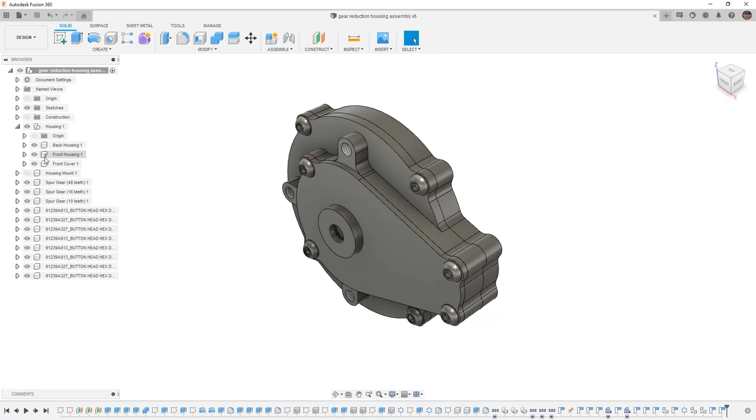To get started, I'm going to hide the front cover, and I also want to hide all of the hardware. So I'm going to start by selecting the eye icon on all the hardware. Note that you can also do this by selecting all the hardware, right-clicking, and selecting Show Hide. You also have a Show All Components and Show All Bodies option.

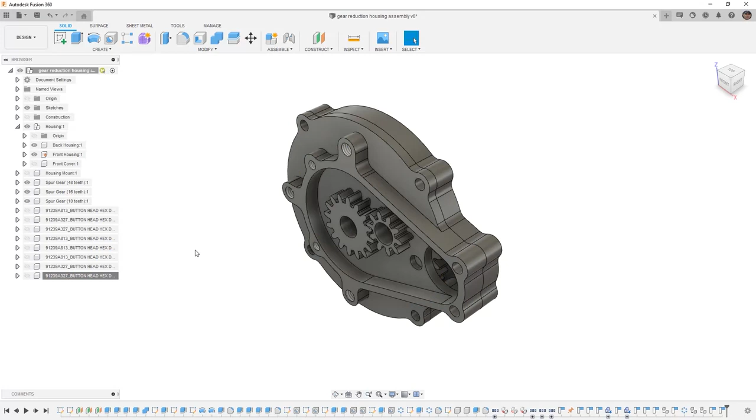From here, what we want to do is we want to begin creating a copy of the smaller idler gear, and then we also need to create a copy of it that we can modify. So we're going to select the spur gear 10 teeth, we'll right-click, and we'll select Copy. Then, at the bottom of the browser, we're going to right-click and select Paste.

This automatically invokes the Move Object components, and we can move it roughly into place, but ultimately we're going to be using Align to position it. You'll notice that it's not quite in the right position, so I'll go to Modify, Align, and then I'll begin by using Control or Command to select the bottom position of the gear, and then I want to select the top position of that hole. I'm going to capture the position and say OK.

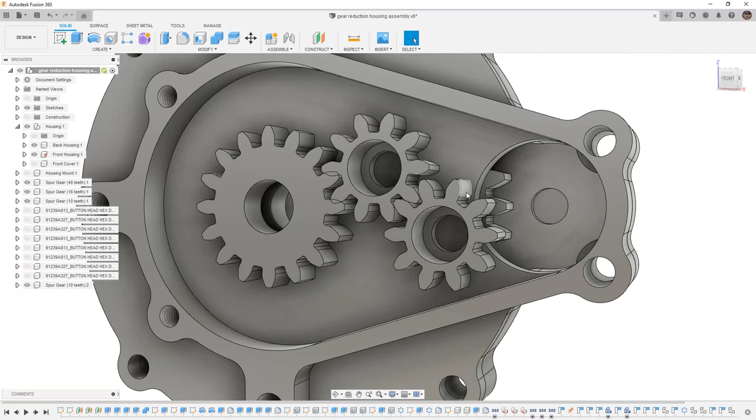This will be important later on when we begin to add our joints because we can use as-built joints if everything is in the correct position. Now that we've created the identical copy of our idler gear, we want to create the version that is the 21mm long idler gear that's going to connect this idler to the drive gear. In order to do that, we need to use something called paste new.

You can see that here we have spur gear 10 teeth :1 and spur gear 10 teeth :2. This means that they're both identical copies, and any changes I make to one will affect the other. This also means that downstream in a bill of materials parts list, what we're going to see is that we have a quantity of 2 of that gear.

If we instead select the gear and we copy it, and then if we right-click at the bottom of the browser and we select Paste New, the Paste New option will create a new unique version of that component. We're going to move it off to the right-hand side, we'll capture its position and we'll say OK. Notice that it's still called spur gear 10 teeth, but instead of a :2 after it, it has brackets with a 1 and a :1.

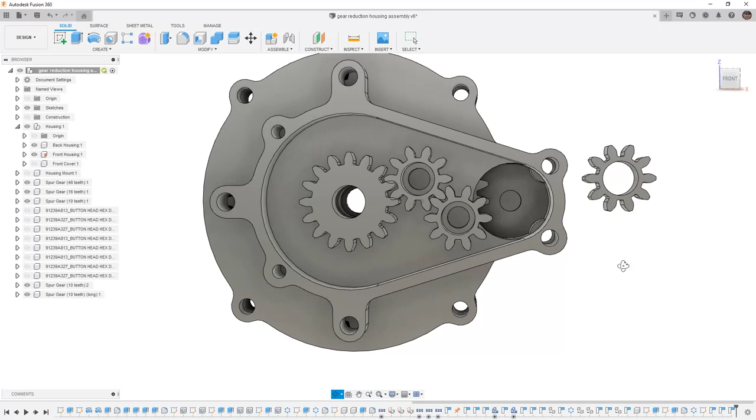We can select and rename this, and instead of 10 teeth, I'm going to put in brackets long, so that way we know that this is the long idler gear. Now, you'll remember that this idler gear is supposed to be 21mm long. If I hide the back housing, it's going to need to travel from the front of this gear all the way to the back of this gear.

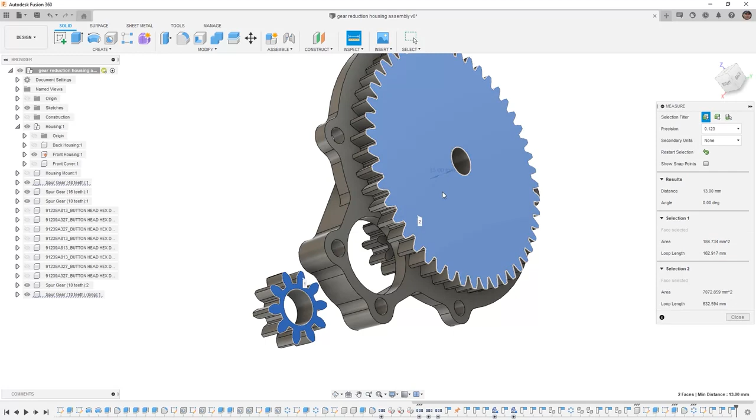Now let's go ahead and use Inspect and measure the distance to make sure we understand how far it has to go. The distance between these two is 13mm. So we're going to select a tool called Modify Press Pull. We're going to select the back face of this gear, and we're going to pull it a distance of 13mm. We're going to say OK, and now we've created a long version of that gear that goes from the front of the other idler gears to the back of the drive gear.

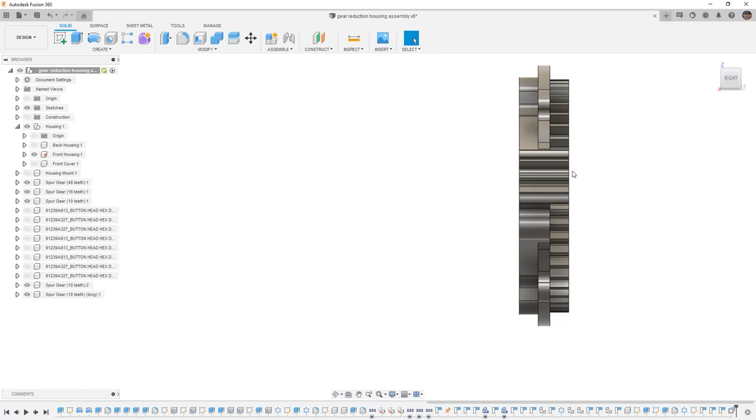If we were to do that same operation using press pull on one of the other idler gears, notice that it changes both of them. And once again, that's because those are 2 identical gears. We just have 2 instances or 2 copies of them inside of this assembly. When we use Paste New, what we're doing is we're creating a unique version.

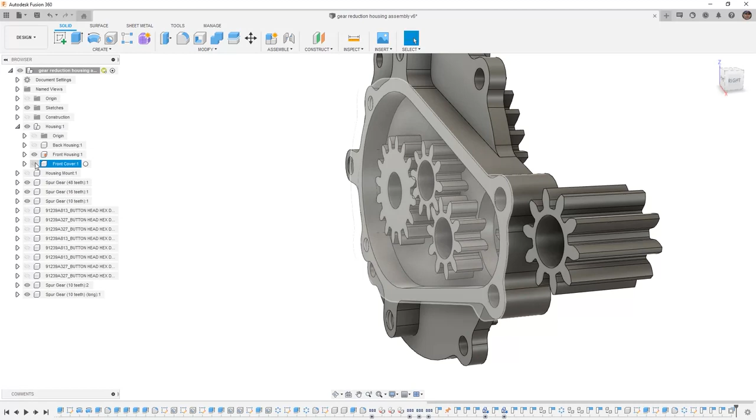Now we need to position that. So in order to do that, we actually have to use either the front cover or the back housing, as there's a position for a shaft to be held in place. So we can use Modify and Align. Again, using Control or Command, we want to select the correct position, capture it, and say OK. Now we can hide the front cover, and we can show all the gears in our design.

So we have the larger gear, which we've identified as the drive gear, and then we have the 16 tooth, which is our driven gear, and we have the idler gear train that goes between them. Once again, the idlers all being 10 teeth are not going to affect the overall gear ratio. As we have 48 tooth in and 16 tooth out, that's going to give us our 3-to-1 reduction or increase, depending on whether or not you're talking about torque or RPM.

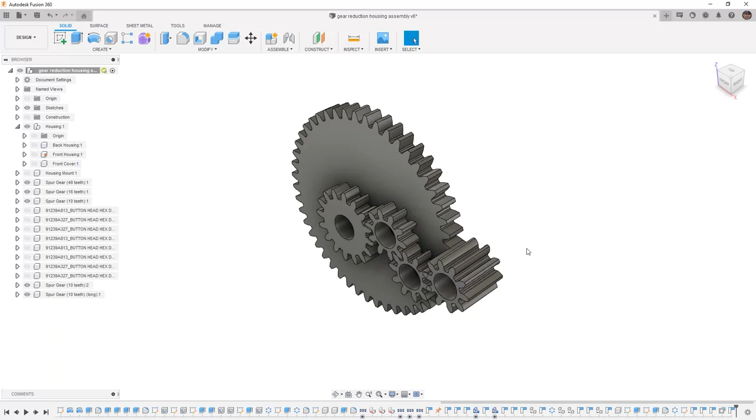At this point, let's bring back some of the housing. In this case, we'll bring back the back housing and the front housing. And then we want to save this design before moving on.